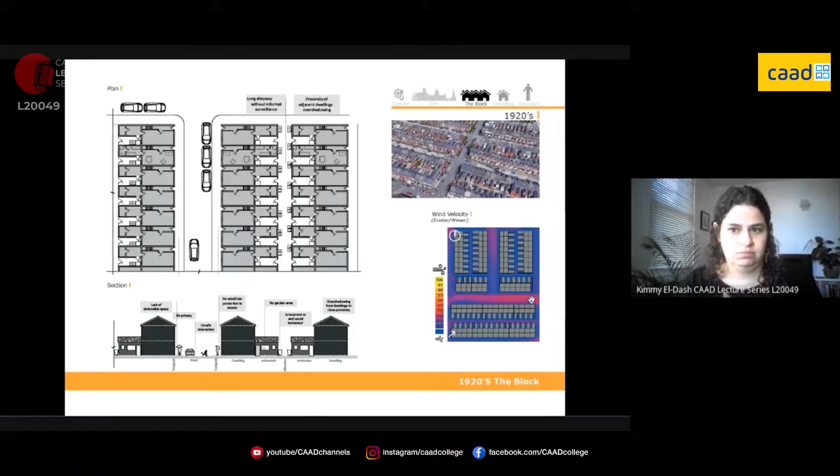Zooming into the dwellings themselves, this is one of the mid-terrace scenarios. From the proximity of the dwellings, we start seeing the effects of overshadowing. Here, where you have an extension very close, you see how dark it starts getting. So this is daylighting. Let's talk about it a little bit. The sun gives us heat and it also gives us light, all for free. So we want to allow this light in.

In a controlled manner, obviously. Someone decided somewhere, they've done these studies, so you talk about figures of 2% daylighting in order to have average throughout a space. Here it's quite reasonably lit. There's some dark patches, but you can see the difference of the distance of the building here, how much it allows more light in, whilst at the back it doesn't. So proximity of the buildings starts becoming an issue.

The other aspect I looked at was, besides heat gains from the sun, we as people also generate heat. The equipment in the house also generates heat. When we're cooking, watching TV and things, we are generating heat, so why not take advantage of this as well? That is then balanced with how much heat we're losing through the fabric. Heat flows from the hot indoors to the cold outdoors, so the larger the difference in temperature, the more heat you will be losing. In a climate where you want to keep that heat inside, if you have a lot of exposed envelope, you're going to be losing more heat, especially in a scenario like this in the 1920s, where you don't have any help from technology, these insulating materials.

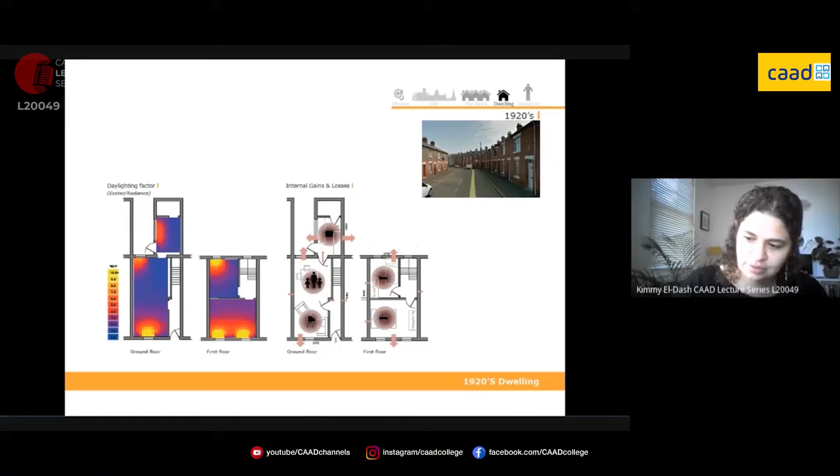So now I'm going to fast forward almost 100 years. Let's look at 2012. Let's see what has improved and if there's anything else that we can do to help.

Now, instead of having those long mid-terraces, we have semi-detached units. They are loosely spread on the site, mainly. We have the rear garden now, so kids have a safe place to play. There is car in curtilage parking now, so cars are not on the street. They provide some sort of shelter for you to be protected from rain when you're trying to open the door of your house. So a lot of good development there, and we don't see those alleyways anymore, which is obviously a good thing.

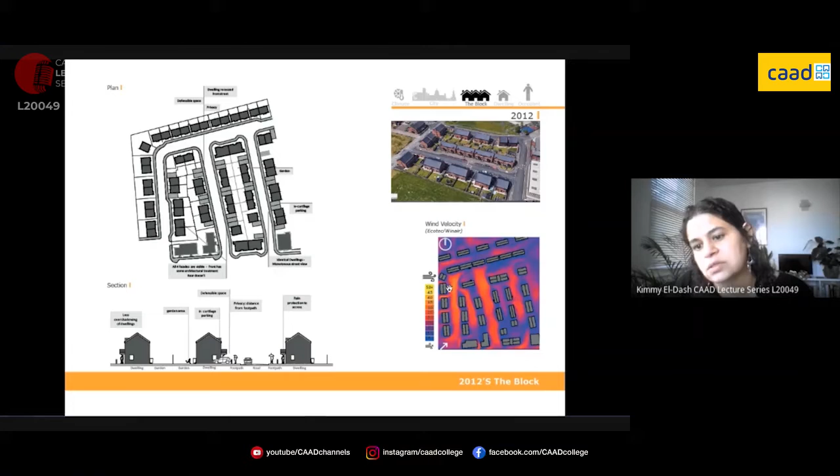In relation to wind, this distance between the buildings starts allowing wind to pick up speed, so that potentially could be a bit of an issue. Before, we were sort of always with lower speed wind, and now it's picking up speed a bit.

Now looking at individual units, we see that distancing between the buildings allows daylighting throughout the whole building. Even in the middle of the plan, we're still talking 2%, and that's not even averaging it out. But in relation to the losses, the internal gains remain the same—it's still the same people living in the house, the same equipment. But now we have 3 sides exposed to the elements. On the other side, these are now insulated so that we lose less heat.

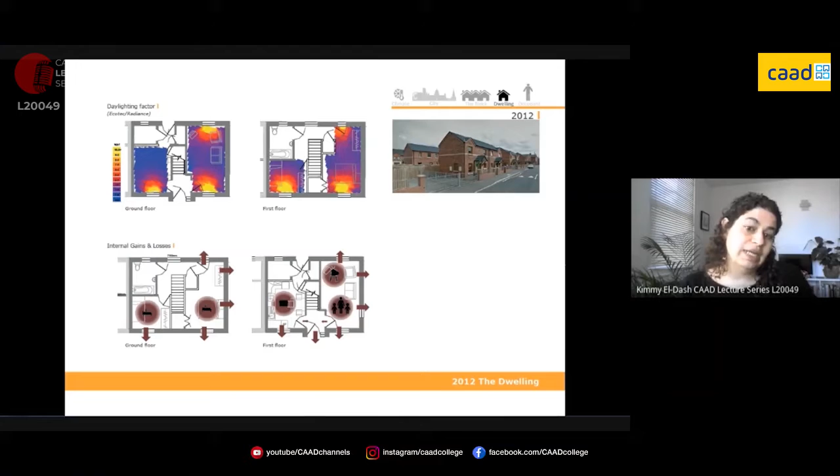So I ran a couple of simulations and applied exactly the same sort of occupancy pattern—the times that people are in the house providing heat, cooking, watching TV and things. I then look at what additional space heating demand is required. This is very much space heating—the numbers I'm talking about relate to space heating. I'm not taking into consideration domestic hot water or anything like that.

First thing I want to point out is when we look at the 1920s buildings without the insulation, we can see how there's a lot of variance between the heat demand from the different elevations, and between a mid-terrace, which is sheltered on both sides, and an end terrace, which is exposed on 3 sides, essentially.

With this new design, even though we are always exposed on 3 sides, we have an improvement from, say, 90 kilowatt hours per square meter per year down to 40 kilowatt hours per square meter per year. So obviously this is really good, because we have significantly reduced the energy demand.

So what does this look like in terms of comfort? Because obviously we are the judges—we will judge whether we want to live in this place or not. So we have to be comfortable.

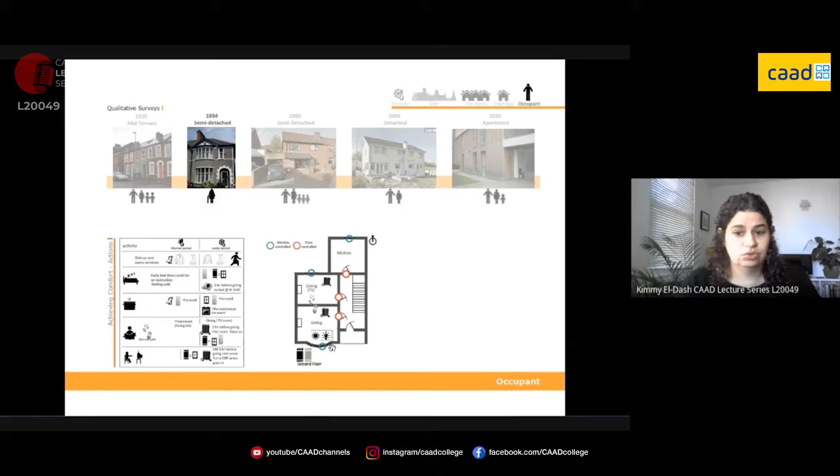And they know what to do. So after a lot of thought on this, I came up with three important conclusions from it. One is that our homes will have a direct impact on our comfort. It will direct us into creating habits, defining actions which we will take to achieve comfort. And these actions all have an anticipated thermal reaction. So I know that if I'm too warm in my house, I'm going to open the window and it's going to cool down, for example.

The other thing I realized was that people are aware of the discomfort. They don't just sit there waiting to be absolutely freezing before they take action. They know that, oh, when I start cooking, it's going to get a bit warm, so I'm going to go and open my window to counterbalance that. Oh, I'm going to close the door because I don't want the smells to go in, and things like that.

And the third element was thermal pathway. So we find spaces in our house where we want to do things. So, oh, I'm going to read my book in the morning in that room because that's where I'm going to get some sun. That's where I have my natural daylight. Or, I want a house that has a south-facing garden so I can sit out in the sun. Sun is a very valuable thing in Belfast because we don't have much of it, so people look for it quite often.

This was also just a quick analysis of when people were using heating or not. So the main thing I got from this was a definition of 3 periods in the year. I have a warmer period, a cooler period, and then there's this intermediate period as well.

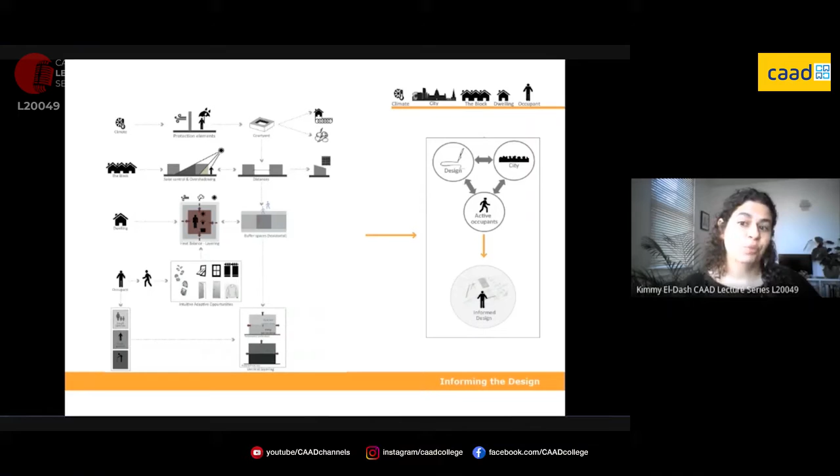And from the occupants, these are the strategies that they use. It's opening and closing things, as I mentioned. So I know the design aspects I need to deal with, I understand my city, and I know my occupant now. So through an informed design, we'll do a little project then.

So this was an actual project in Belfast. It's called The Village. The government surveyed these homes, and the ones that were in reasonable condition, they refurbished and added insulation to try to keep that heat in, and changed the glazing so that it was double glazing and not single glazing. Some of the houses were beyond repair, so they unfortunately had to be demolished.

From a carbon perspective, maybe not the best thing to do, because you have to rebuild, so you have to manufacture more materials, extract more materials, and there's a carbon side to that. But from an operational energy perspective, the energy we use inside the house, these new houses will probably perform better, because we're going to have a lot of insulation and try to keep them quite warm. So phase 2, the green, was built, and I was then looking at the red site here.

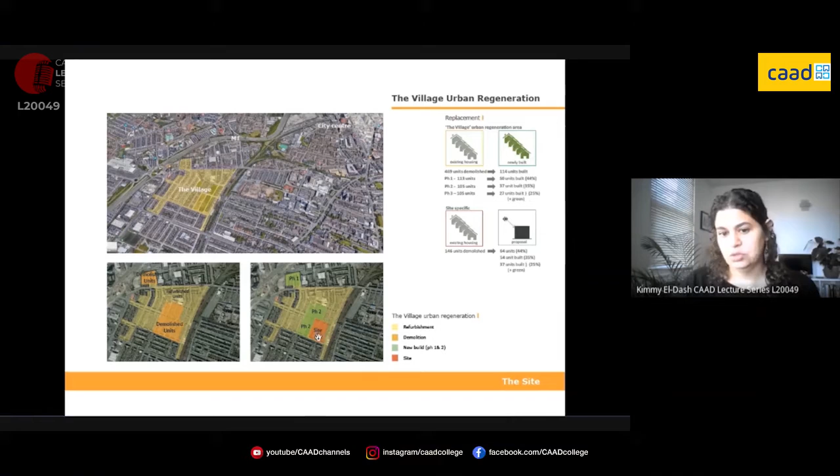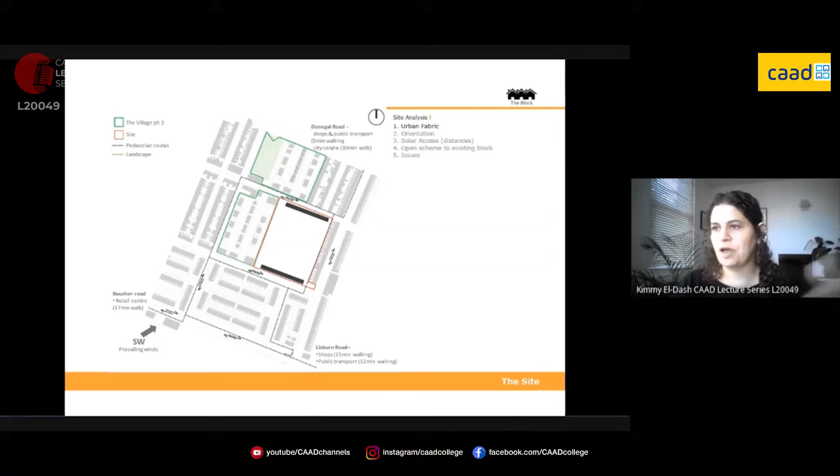So now, a very simple site analysis, just thinking of the things I've been talking about. I have my urban fabric. There are strong lines within the surroundings, so I wanted to maintain these urban fabric lines that were apparent. I wanted that courtyard scenario to try to block winds, but I'm also concerned about my orientation, so I'm going to have to start turning my building because this is not perfectly orientated. I did a little study. All the houses around here, the whole area, is 2 stories.

So I knew I wasn't going to go too far above or too below that. So I do a quick shadow analysis just to see what sort of distancing I'm talking, because I know the effect the proximity of the buildings is going to have. So I look at the three sample days to see the length of my shadow. And obviously, we can put one dwelling there and you get sun the whole year. Absolutely fine. But nobody's going to want to build that.

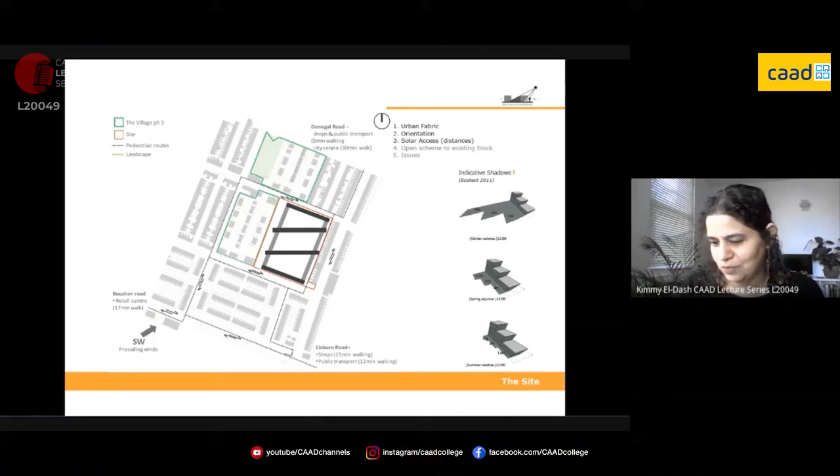So there's a balance between densifying the site so that it's financially viable and still allowing people to be comfortable in their homes without us ending up releasing all that amount of carbon. So there was an existing block there. So if I were to retain a line of houses here, I was going to end up with the same problem that I analyzed.

So let's have the existing block as being the 4th side of the courtyard, and hopefully they will turn their house towards the back of it and take advantage of the spaces that I'm creating. So help bring the community into the site as well. As I'm doing this, I start realizing that there's a couple of areas where performance will be compromised. So maybe housing is not the best use of that space.

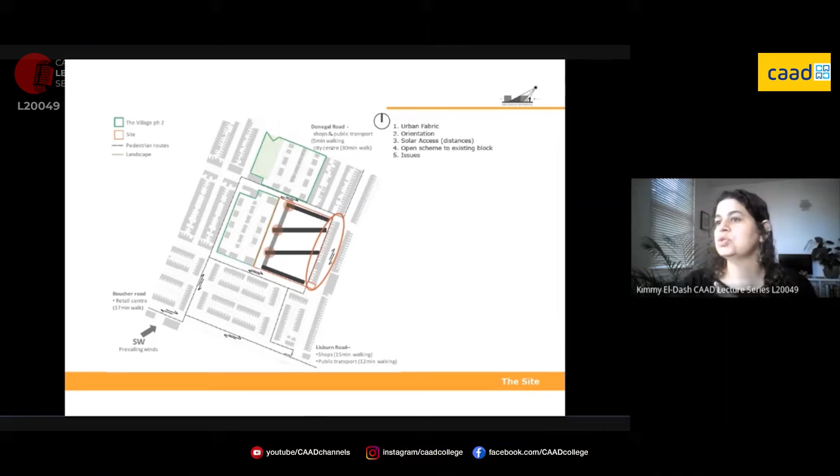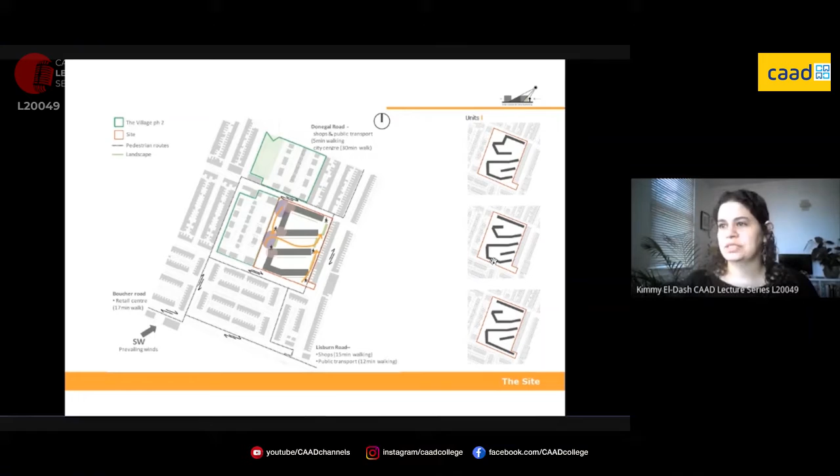I start defining where I want my pedestrians to go, what sort of routes I'm anticipating that they're going to be using. And at the same time, I'm starting to look at my units and playing around with the massing to see how many units I can get on site. So looking at the massing of the unit specifically.

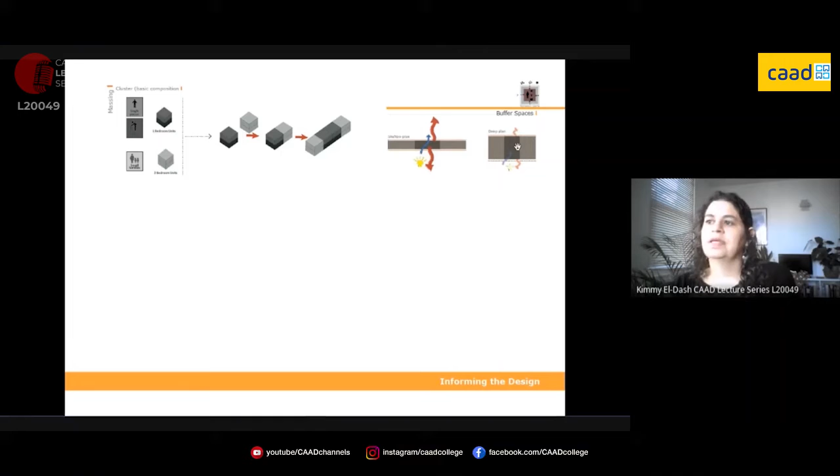So I had another decision to make, whether I wanted a shallow plan or a deep plan. A shallow plan means I'm going to have more exposed envelope, so I'm going to have more losses, but from a daylighting aspect, it should perform better. From a ventilation aspect, it should perform better. On a deep plan, I have less losses because I have less exposed envelope. Ventilation, I have to think about a bit more carefully, and daylighting, I will also have to think about a bit more carefully.

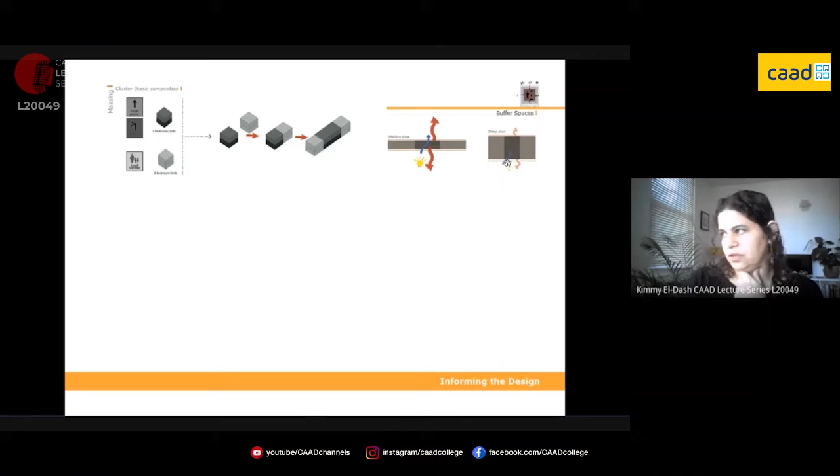So also, I developed a cluster which I want to be able to replicate throughout the site so that we have economies of scale as well. So I start playing with my cluster to make sure I'm catering for all those issues that we were talking about: sheltering from the rain, sun access, making sure when you're trying to open your doors, you're not being blown away or things like that.

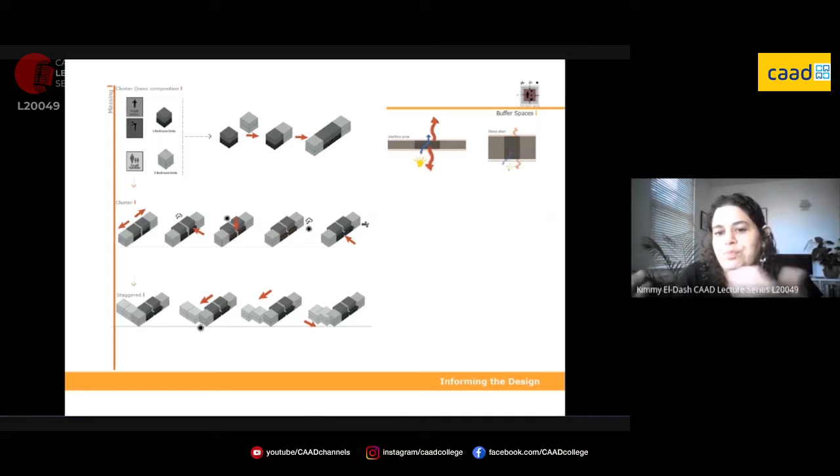And zooming in further now to the unit itself and looking at the buffer spaces, I identified the spaces where the comfort temperatures need to be a bit more specific. So those key spaces, living room and bedrooms. And I want to allow my free heat to come in, and I want to try to control how much loss is happening.

So I use the same idea I've been talking about the whole time: these buffering spaces that have less controlled temperature requirements. So I don't have to heat a corridor to 20 degrees. So if it's 15 degrees instead of 20, for example, I'm already losing less heat than I would to the outside. Kitchen, very important element of any house.

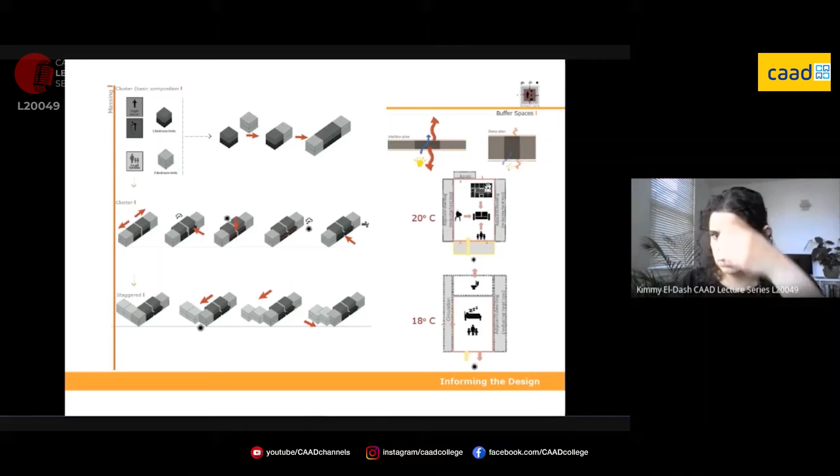So there's a lot of heat gains that come from a kitchen, but you want to make sure that you're using them to your advantage. So the potential for ventilation of a kitchen is extremely important, because if it's already a bit hot in your home, open your window, out goes that heat that you don't want at that point in time, or even for smells. So the ability to ventilate is always important. So I put all of this together and I created the different layouts, taking advantage of all of these elements.

Another aspect to be discussed is openings. So we talk about window to floor ratios or window to wall ratios. So the idea is that a window is one of the weak spots in a house, because as much as you can allow your solar gains in when you want, it doesn't perform as well as an insulated wall, for example. So you do have losses through the windows, but we want that daylighting and we want those views. So not having a window is not an option.

So what I do in this analysis for all the different units is try to understand where the heat balance is: what I'm getting from the outside, what I'm getting from my heat from the sun, and when does it equate to the losses?

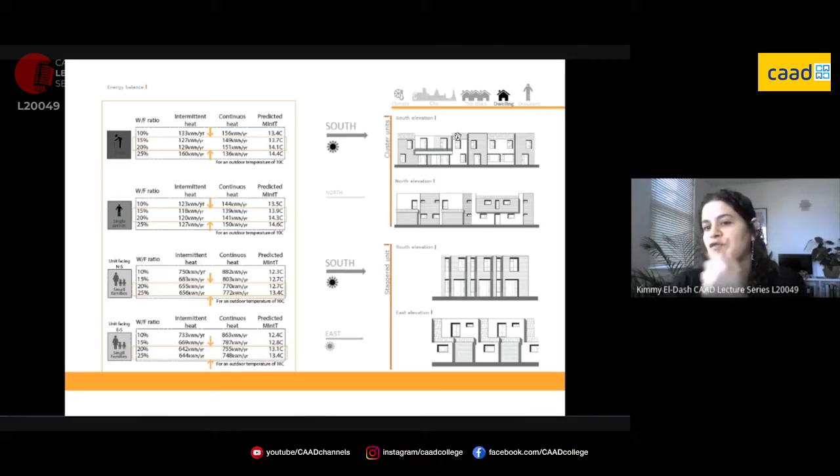So I identify the area where that heat balance is, and then I know roughly the amount of window I have to have for that unit. And then obviously, because in the south I have the potential for getting that heat gain, I will have larger openings. And to the north, where I don't have any gains and the window is just losses, I will have smaller openings. So I apply that.

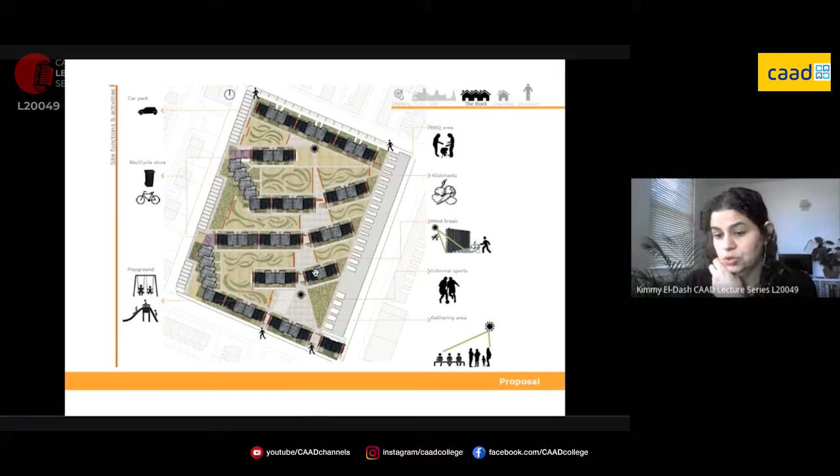And because now I do have the potential for wind picking up speed through the development, I introduce some devices to try to control that. This is the device that I use. And I actually got 65% of replacement, and the original schemes were getting around 45%.

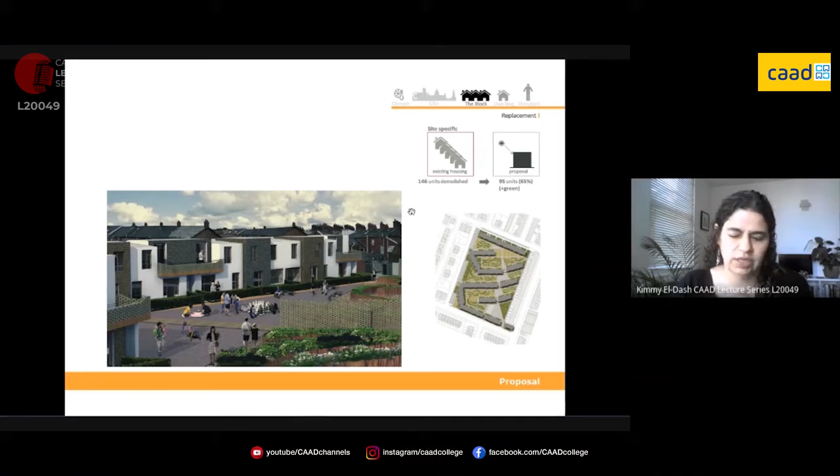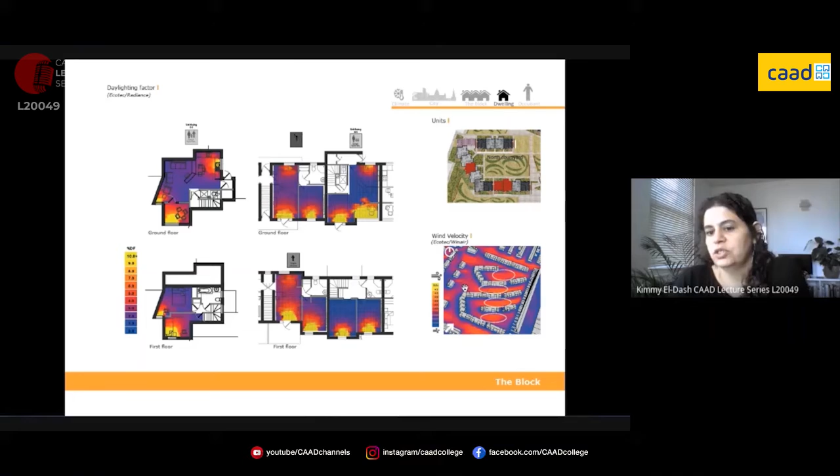So I do, again, the same exercise of trying to understand the daylighting, which I have 2% in the middle of the plan for all my units. And here is where I could actually physically see that there was an issue with the wind. So I introduced those devices I mentioned earlier.

So a day in the life of someone in that house. I have those 3 periods of the year which I need to carefully analyze. So I get typical weeks and look at them to see how my building is actually performing. Summer period, I am pretty much in comfort. It depends on how much direct solar radiation I have, because that was the intent of the design. And I start realizing there are some points that I would have to address if I was going any further.

So let's look at this day in the mid period. Here is one of the buffer spaces: the entrance buffer space to the north and the buffer space to the south. So my temperature gradient for someone coming in starts at 8 degrees from the outdoors. And as soon as I come into this unheated space, I'm at 19 degrees. So that's the first temperature step.

Then you come into the house, you're almost at 21 degrees. So you might be happy with that. But if you want it to be a little bit warmer, you can come into that buffer space and take advantage of the heat that's there, or you can open the door and let that heat come out. Simple control measures again, because this is what I realized from the little research I did with the families.

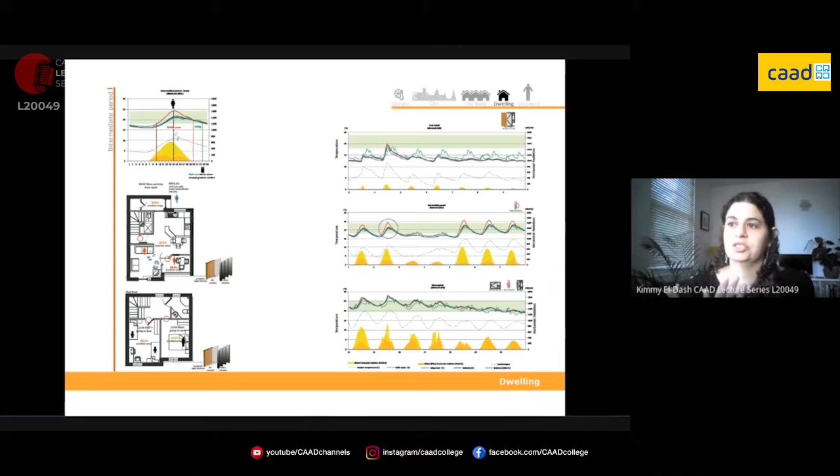So passive strategies for the windows. I have a net curtain so that you can have your privacy and still allow daylighting in. I have blackout curtains, because in Belfast at times it's 11 o'clock at night and it's still bright outside, so having the blackouts would be quite important. And in addition, I also have an insulated shutter, because the windows are one of the weak points where we lose a lot of heat. So with these insulated shutters, we can close them in the winter and keep that heat inside the house.

So how does this new proposal perform in relation to what we had before? We were at 40, and as expected, all 4 orientations are very continuous because of that insulation. And we are now down to 10 kilowatt hours per square meter per year.

So just to be clear, the insulation values, the fabric performance, air tightness, all of those figures were exactly the same. The only difference is using the design strategies: bringing back the idea of being a mid-terrace and including all these buffer spaces that aren't heated, which separate and create this temperature gradient. So let's see how our proposal is actually performing.

So the orange was the 2012, and now we are talking about the green, which is the proposal using environmental design and passive design strategies. And yes, there is a little bit of an issue with overheating, easily controlled through openings, but again, if I was taking this further, I would start considering whether I wanted to have some sort of solar shading or not. But anyway, I actually now am heat-free for 9 months of the year, essentially, or maybe 8 months of the year. So further improvement, and this is just architectural work, it's design work.

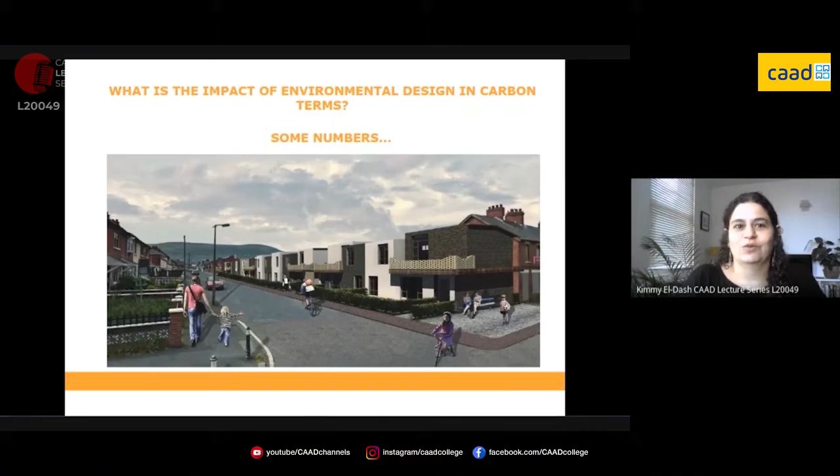So how can we quantify this now? What's the impact of the environmental design in carbon terms? So let's look at some numbers now for the fun bit. Remember way at the start, I mentioned embodied carbon. The embodied carbon is for the manufacturing of the materials used. And so I did a quick analysis on that. I'm just going to highlight this, which are the areas of the 2012 and the proposal. My proposal is slightly bigger, so I will be using more materials. Window to floor ratio is roughly the same, slight difference, but it is a bigger unit.

And once I look at the embodied carbon of the materials used, again, just for the substructure and superstructure, I don't have any mechanical equipment quantified. There would obviously have to be something, but it's not quantified here. So the embodied carbon, it's roughly from 25 tons to 25.5 tons. And what about the carbon of that additional space heating we're going to need to keep the house warm in those 4 months of the year or the 6 months of the year?

So for the 2012, I use the kilowatt hours, the total for the year, and I multiply. This is a slightly old figure, but it's from December, and it's an actual value. It's 0.25 kilograms of carbon per kilowatt hour. So I have 760 kilograms of carbon per year, whilst with my proposal, I'm talking 175 kilograms of carbon per year. So this is the last number, I promise.

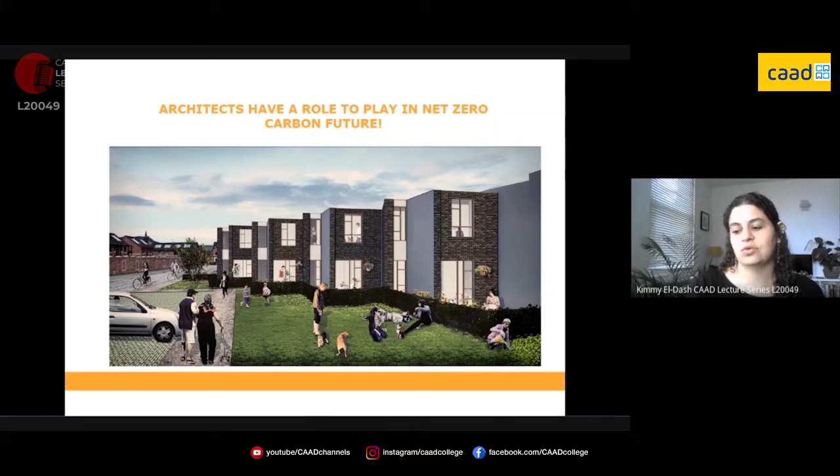All right, thank you for such an informative session. I think we really enjoyed how you've broken down every parameter and checked the boxes of everything that we should consider as architects, starting from the city level and moving down to the block, the dwelling, and even the occupants and how they interact with the spaces and how that later has an impact on the energy analysis. Your informed design, the way you've taken an example and broken it down to very tiny bits and pieces on where you made the design intervention, was quite brilliant. And what students would really appreciate is how the simulations helped you to see the impact of your design intervention. That is basically what we're trying to achieve with energy efficient and sustainable buildings. Thank you so much for that.